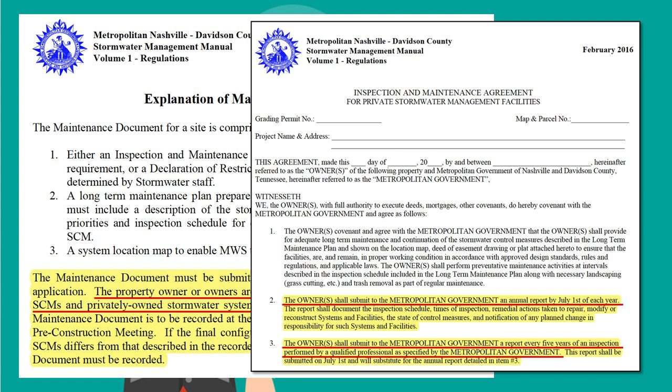Okay, what is it I'm supposed to do? Well, the manual in Nashville says that when you turn in a site plan as an engineer, you're going to have to fill out a long-term maintenance agreement. And then that's going to be assigned as a deed restriction that's going to go with the property basically forever. And essentially everyone else has kind of adopted that same strategy.

If you go into the details of this particular document, it plainly says that the property owner or owners are responsible for inspection and maintenance. So the burden is definitely on the property owner, and that's something that's oftentimes misunderstood.

In addition to that, if you get into the actual meat of what's required on a regular basis, it'll start talking about annual reporting. If you get into the long-term maintenance agreement itself, it'll say that you're supposed to do annual reporting, and then you're supposed to do maintenance as needed. And then every 5 years, you have to have a professional engineer actually do the inspection. So I started my business with the idea of being able to provide that at an absolute minimum.

Next question that I get asked all the time is, is this documented on the plat, and can I get a copy? That is, I think, a fundamental misunderstanding of what a plat is. A plat is just an illustration of the legal language that's in the deed, right? So it's go from this corner south 19 degrees, 35 minutes, 1 second east, 131.89 feet. That's what a plat is, okay? It just illustrates what's in the legal documentation.

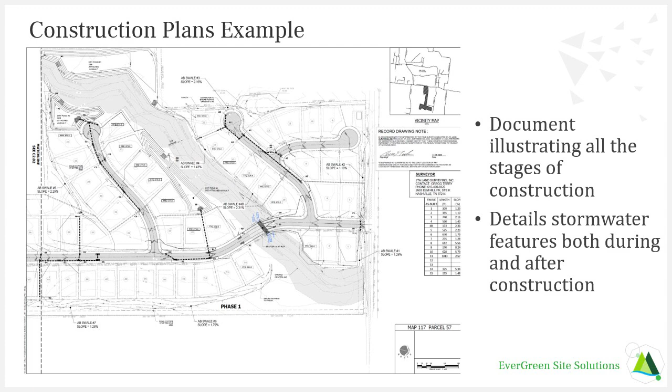What you really need to get if you are a property manager or if you are someone that owns a piece of property is the original construction plans. Those original construction plans are just priceless, and they're really hard to get a hold of. Once the project is built and it's 5 or 6 years old, those things are gone, and it is really hard to get them back after they're gone.

This is an example of some construction plans for a subdivision that was over in the Mount Juliet area. And you can see that this document will illustrate all the different stages of construction, and it details the stormwater features both during and after construction, and that's really key. The erosion control plans that are happening during construction is one kind of stormwater. That's the silt fences and the sediment basins and all that.

But what happens after construction is when those ponds get converted to something else, and that's really a fine dividing line. It's really important that you actually understand both. And those construction plans will have the details that are here on the left that show exactly what that's ultimately supposed to look like.

Nowadays, though, and this wasn't the case until just recently, what we're seeing is these as-built details and calculations. I'm starting to see them all over the place. It was just Franklin that was requiring this, but now Nashville is. Spring Hill's requiring it too. You guys may require it here in Sumner County. Marshall said yes.

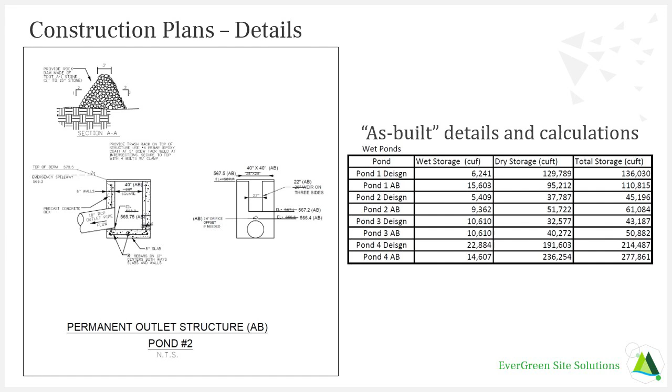So what's happening now is these ponds, for a long time, they were just built and no one actually checked to see if the volume was really what the volume was supposed to be. What's happening now is that we're actually going out after construction is finished and resurveying the pond to make sure that the holding volume is actually the right holding volume. So if we can get those as-built surveys, those as-built plans, that's also super important for long-term stormwater compliance.

It's estimated that there's about 8,000 of those properties, not flowers, 8,000 properties in Nashville that have some kind of stormwater feature on it. In addition to that, there's 100 new ones every single month. So if you think about how that looks, it's obvious if there's a subdivision or a commercial strip mall or whatever. What's not obvious is when they go in with like an HPR. When you guys see an old ranch house that's in Oak Hill or something like that, and it's an acre, and they go in, they knock it down, and they put up 4 skinnies.

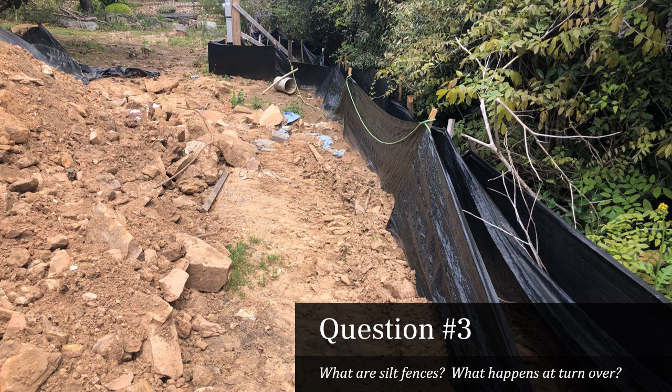So question number 3 I get, what are silt fences? People ask me that all the time. What are silt fences? What happens at turnover? What am I supposed to do? I deal with a lot of property managers. And silt fences, and a good turnover example is back to this one. This is the one in Mount Juliet like I was talking about.

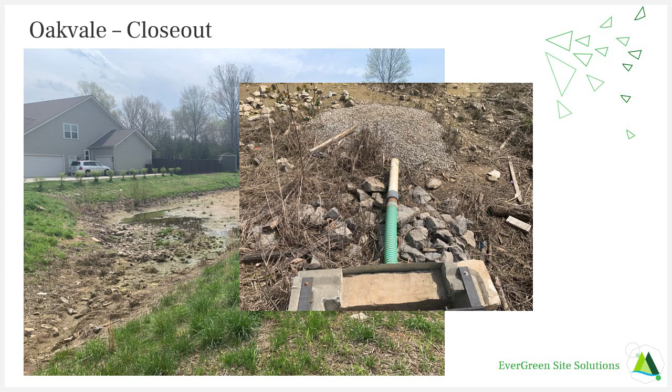This is an example of a sediment basin that was essentially, the developer was ready to turn it over, okay? So what you can see is it's all silted in, right? It's really got a lot of sediment in it. It needs to be hogged out. They need to do an as-built survey, but none of that was happening. This device here is called a Faircloth skimmer, as a lot of you guys know, but the top of it's been torn off and taken away for some reason. So this was just kind of left.

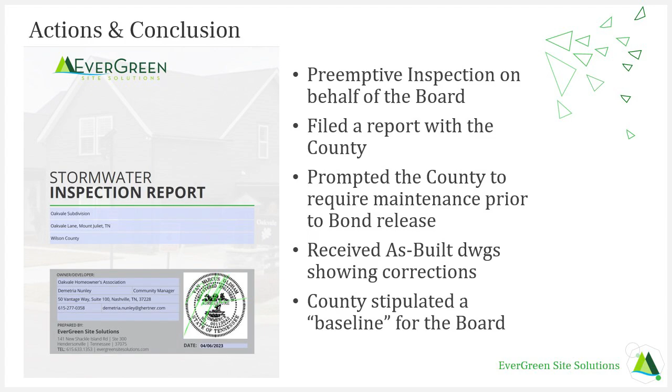And the HOA was really concerned about inheriting this and then having to maintain it as per Wilson County or Mount Juliet regulations. So they worked with me, and basically what I did is I went out and did a preemptive inspection, and we turned that over to the board, and the board gave it to the county, and that prompted the county to require maintenance prior to the bond release.

And ultimately we received as-builts, and the county, essentially by doing that, had kind of established a baseline for the HOA, because this is the point where the county said, okay, we're good with it. So anything past that was, you know, we're just trying to get back to that point in the future, if that makes sense. So moving on.

So question number 4, what has to be done and when? So this is the part of my presentation where I really kind of talk to you guys about lessons learned, specifics, right? So the BMPs or SCMs, whatever you want to call them, the things that we have done and the things that we have seen that work and what doesn't work. But I think it's really important to get that background because a lot of people just don't have it, and I want to make sure I give that opportunity.

So it depends on what kind of stormwater device that you have. So if you have a detention pond, or if you have bioretention, or you have a proprietary device, the requirements for what you have to do for inspection and maintenance radically change if you want it to actually be successful and function the way you want it to. And you always have to keep in mind what it is we're trying to do, which is to trap that sediment. The sediment is always there. It doesn't matter if it's bioretention, permeable pavers, proprietary filters, whatever. Sediment is the thing that's trying to clog it up. And so we have to keep that in mind constantly with what you're doing.

I like to start with detention ponds, and the reason I like to start with detention ponds or dry ponds is because that's what we have the most of. We've been doing detention or dry ponds here in Middle Tennessee since at least the late 80s, maybe even before that, in little places here and there. Sometimes I get calls from subdivisions that are super old, and they'll have a detention pond. It won't be a really great functioning detention pond, but they'll have one. And that's kind of when they started popping up.

Usually what we see is a lot of erosion around the inlet structures and the outlet structures, because once they're armored and then they get off the site, that kind of goes away, or it begins to unravel over time and then it doesn't get fixed back. So that's a big issue.

One of the things that I recommend to people is never cut the grass less than 6 inches. There's a lot of cities that are codifying that now. Franklin actually codifies that. You can't cut less, I think they say 5, but I always tell people 6 because it's just easier to measure. So don't cut it less than 6 inches. I tell HOAs all the time, if you're having the guys come mow it every 2 weeks during the summer, that's not a good idea.

It's not what we want. It's supposed to look a little shaggy in there. It's supposed to look a little bit natural. It's not supposed to look like Augusta National. So, you know, that's kind of something to keep in mind.

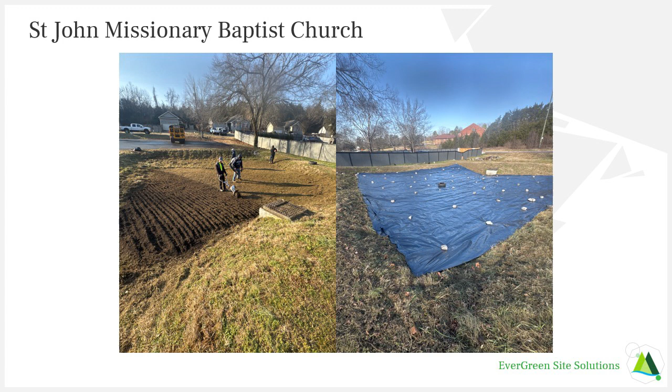And then the last thing is an idea that I came up with. Explore the idea of converting a detention pond to a wildflower meadow. So we've actually already done this one time. This is St. John Missionary Baptist Church. This is down in Antioch area. And I became pretty good friends with the pastor down there. His name's Gary Murray. And we cleaned out his pond because they had a violation with Metro.

And I came back later and I said, hey, Gary, would you let me kind of do an experiment here? And he was like, well, I don't know. What do you want to do? And I said, look, the problem is, if you don't know, it's something like 60 to 80% of pollinators worldwide have died over the last 20 years, right? Without pollinators, we don't eat, right?

That's a problem. Just 2-3 weeks ago, it was on 60 Minutes about the monarch butterflies. Did anybody see that? It was amazing. So monarch butterflies, every 9th generation, they have a super generation that lives for an entire year. Nobody knows why, nobody knows how, but they have a super generation that lives an entire year.

So if monarch butterflies are born on the eastern side of the Rocky Mountains, they migrate all the way from Mexico, all the way up into the United States, all the way up into Canada, and then every 9th generation, I think it is, they have a super generation that lasts for a year, and they all migrate back to Mexico, and they winter there, and then they have their babies, and they do it all over again.

So what's interesting about monarch butterflies is that they only lay their eggs on milkweed. That's the only thing they lay their eggs on. And in fact, TDOT's got a program right now where you can get milkweed seeds from TDOT and plant them in your yard if you want to. The reason is because monarch butterflies are dying like crazy. And a lot of it's because of habitat destruction.

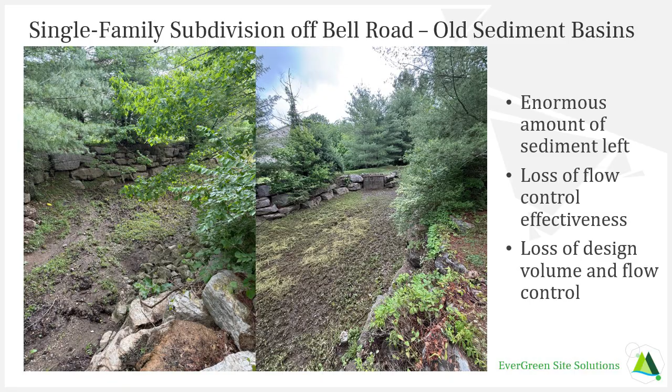So this is what happens when it doesn't go right. So this is a single family subdivision that I've been working with for a long time. They're over on Bell Road, outside on the east side of Nashville. And what you can see here is a pond that didn't have an as-built, and they used it as a sediment basin during construction, and then when they left, they just left, right? And so what you can see is just tons and tons of sediment, topsoil runoff from the construction of that subdivision, right?

It filled up the pond over time, and then it got worse as the years went on, right? So it's an enormous amount of sediment that's left. You're losing a lot of your flow control effectiveness, and then you're also losing the design volume, which was the whole point in putting the stupid thing in to start with, right? So you're having downstream erosion, you're gonna have downstream flow control loss. There's a lot of things that will happen there.

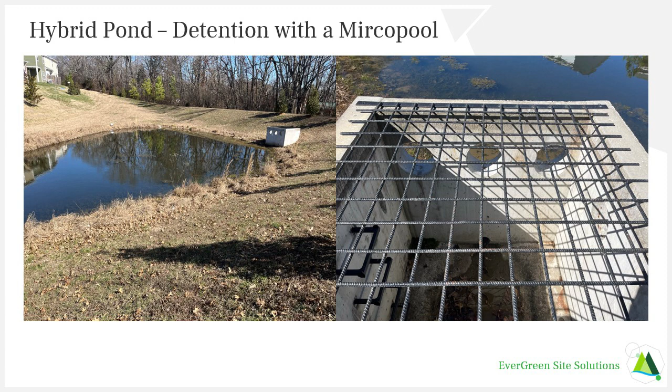This I kind of call a hybrid pond. I guess technically it's a wet pond, but it's really more of a detention pond with micropool, for those of you who have seen that in the manual before. This is really popular in like Wilson County, Mount Juliet area. I see it a lot over there, sometimes down in Rutherford County, but there's always going to be a little bit of wet storage over on the left-hand side. You can see that where things are separating out in the water column, and they're hoping for infiltration.

And then if you have a large storm event, the orifice here on the right-hand side will start controlling the storm, and if it gets high enough, it'll go into the other orifice at the top there. So you see that quite often. The biggest issue with these, honestly, is cattails. Cattails is the biggest problem, and the reason is because the depth of the water level is almost always like 4 inches or 6 inches. It's almost nothing, okay? And so it's an ideal habitat for cattails, to which people will say, so what, right? What difference does that make?

The reason it matters is because cattail population exports phosphorus and it exports nitrogen, believe it or not. They give off more than they take up. And so you start to think to yourself, why do we have bioretention? Why are there plants in bioretention? A big part of it is sediment, but another huge part of it is for dissolved pollutants like phosphorus, nitrogen, bacteria, and stuff like that. So if we're exporting it, we're kind of wasting our time, right? So there's nothing wrong with that design. There's certainly a lot of them out there, but as far as maintenance is concerned, we really have to stay on top of it, make sure it's doing what it's supposed to.

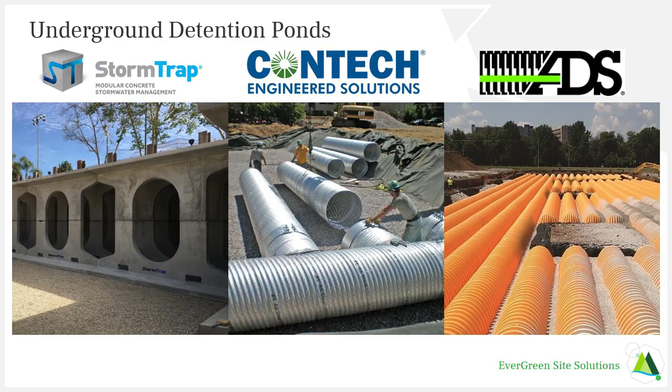And then, of course, there are underground detention ponds. Not something we see a lot in Sumner County, but a little bit. It's starting now. I think here in Gallatin, over there where the new hot dog place is, what's that place called? You know what I'm talking about, over there across from the plantation? Double Dogs, yeah. They put a big underground detention system in there, I think. I think it was actually a metal one.

But all of these are basically the same. They definitely have different uses in different places. You see the concrete a lot downtown, like in the Gulch, places like that. The metal is usually the least expensive option if the contractor has time for them to fabricate it. And the ADS chambers that are over here on the right, those are used a lot when you have a big footprint. So if you have a big Walmart footprint and you can put it under the whole parking lot, sometimes you'll see those because they're really easy. You can just grab them off the shelf. They're all the same size, they're all standard. So it's kind of dependent upon the project which one gets used, and they all have different usages.

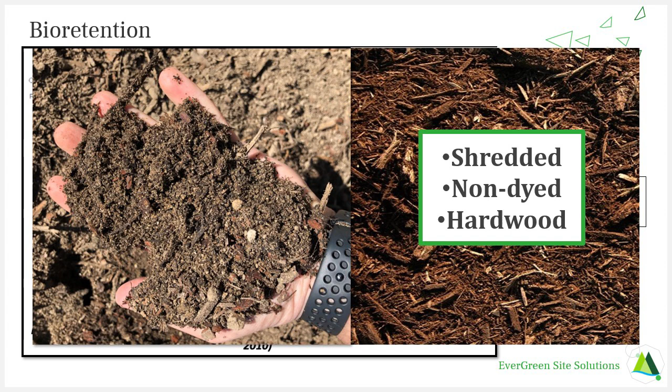This is, of course, what we see the most of, though, bioretention. Bioretention is extremely widely used here in the Middle Tennessee area, as well as basically anywhere in America these days. It's usually about 3 foot thick of media, and the biggest and most important and most neglected part of bioretention, in my opinion, is either the plants or the mulch. The mulch is key. It is really, really key. And in order to understand that, you have to understand how this system works, okay?

So I said I was living in Baltimore when they rolled it out. The reason they rolled it out in Baltimore is because they have a big problem in the Chesapeake Bay with phosphorus and nitrogen. So in order to get phosphorus and nitrogen out of stormwater, you either have to have a chemical or a biological process. So somebody came up with the idea that if we have bioretention with plants in it, those plants will be able to thrive off that nitrogen and phosphorus, and as a result, clean the stormwater.

So a lot of different mixes started being used, and the one that we use here, shown over there on the left-hand side, they're kind of like potting soil, but not really. They flow really, really fast. They're very open graded mixtures. The problem with bioretention media, though, is because it's really open, sediment wants to get down in there. And when it gets down in there, it clogs up those openings in the bioretention media. If it ever clogs it up, there's no way to get it out. It's in there, and that's it. So how do you deal with that?

Well, the way you deal with that is with the mulch, but it has to be the exact right kind of mulch. You have to be using shredded, preferably triple shredded or at least double shredded, hardwood non-dyed mulch. And if you use that, then it won't float away. The water has to go through the mulch before it gets to the media. And the reason that matters is it leaves all the sediment behind on the mulch. So if we remove and replace the mulch on a pretty regular basis, that media, which is really where the magic happens, stays healthy and stays good.

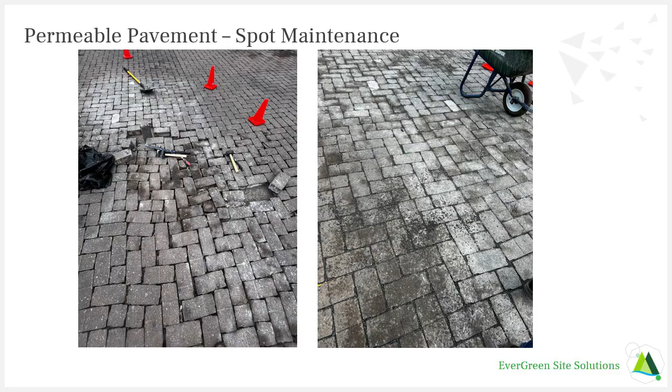I recommend that people do the regenerative sweeper every year, and then every other year we'll come back and we'll put in that crushed quarter clean to stabilize the bricks and stabilize the pavers. We do fix these on a pretty regular basis. Places where folks have pavers that are all torn up, we'll take them out, clean the aggregate below, and reinstall the pavers with the quarter clean like we're supposed to.

And then we also have other things that happen like this. This was a really odd situation. So we cleaned the pavers and we couldn't figure out why they weren't infiltrating. And you see that little brown line right there? What that is: during construction, they didn't have a lot of sediment control. So they didn't have a lot of silt fences.

And what happened was they had a really big storm event. There was a lot of sediment that washed onto the gravel, and then they didn't clean it. They just kept on building. And so it created this impermeable layer in the pavers where we couldn't get the infiltration capacity that we were supposed to. So we ended up having to dig a bunch of it out and essentially rebuild it. But that was one of the lessons learned: make sure your pavers are taken care of during construction. Otherwise, it'll be a problem after the fact.

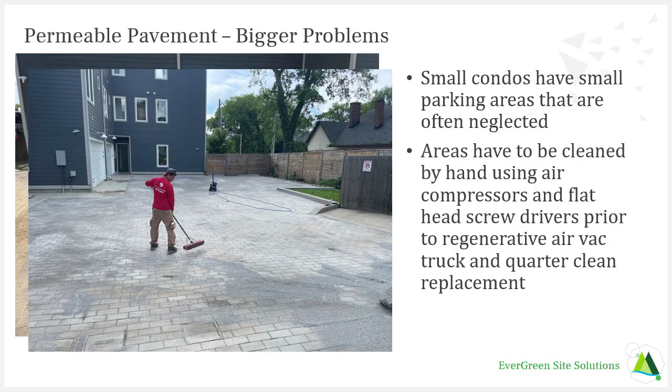Another problem is pavers are used a lot on little projects. So those HPRs, like I was talking about, horizontal property regime, they'll take a 1 acre site, they'll take away that old ranch house, they'll put up 4 tall skinnies, and in between they'll have a bunch of permeable pavers. That's totally fine. They work great. There's nothing wrong with that. But the maintenance is difficult because it's not very easy to get in there with the regenerative truck.

And so what we've done is we've started using a system where we literally use flathead screwdrivers and an air compressor, and we blow it out that way. And then once we've blown it all out, we vac it up. And then of course, after we've done it, we come back and put in the crushed gravel as well.

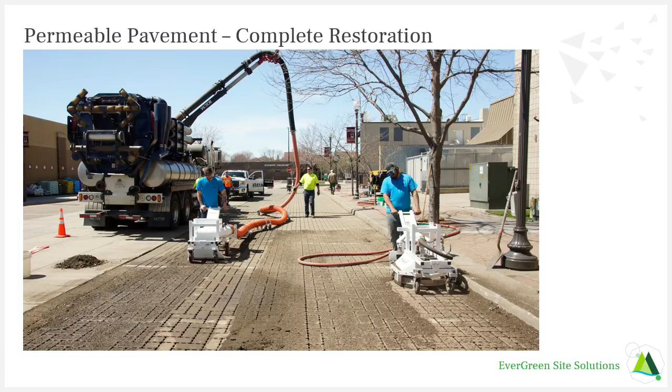Now, if all hell breaks loose and the pavers are just completely clogged and they're still there, but you can't do anything with it, the only thing that I've seen that actually works, and there's research for this, is this machine here. It comes out of Minnesota. That's called a Typhoon. And what that thing does is inside there's these arms, and they actually don't turn real fast. They kind of turn slow.

They have extremely strong jets of air that blow all the sediment and all the aggregate and everything out from between the pavers. It just completely blows it out. And then you come behind it with essentially a huge vacuum cleaner. You just suck it all up, and then you put the pavers back. Now that's the only thing that I've ever seen that will actually bring the pavers back to 100% capacity. But there's some research out there from University of Toronto that actually details it, and it's very, very compelling stuff.

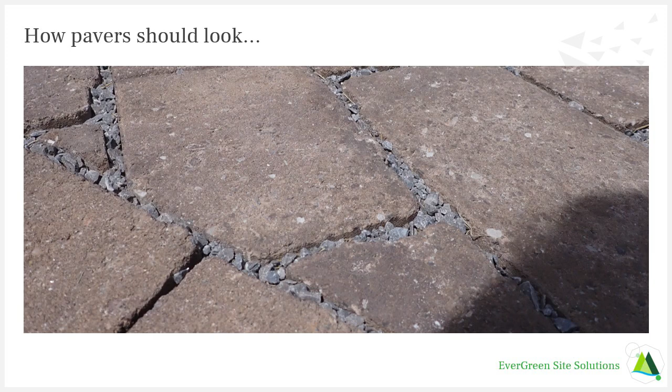This is what your pavers should look like. This is one that we just got done with. You can see how that stone comes all the way up to the surface. That's really, really important.

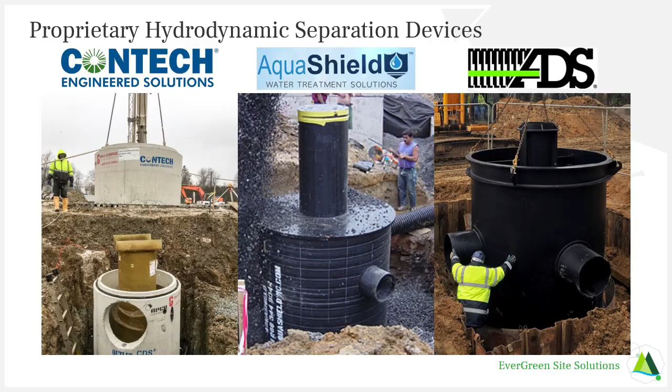Hydrodynamic separators, proprietary devices, I just got about 5 minutes. There's a million of them on the market. AquaSwirl or AquaShield is the one we see probably the most here, and the reason for that is because they're from Chattanooga. So they were made in Chattanooga. They got bought. I don't think they're there anymore. But as a result of them being local, we see those here a lot. I love these things. And the reason I love them is because they're really simple to maintain. It's really, really simple to maintain, and it's also very predictable.

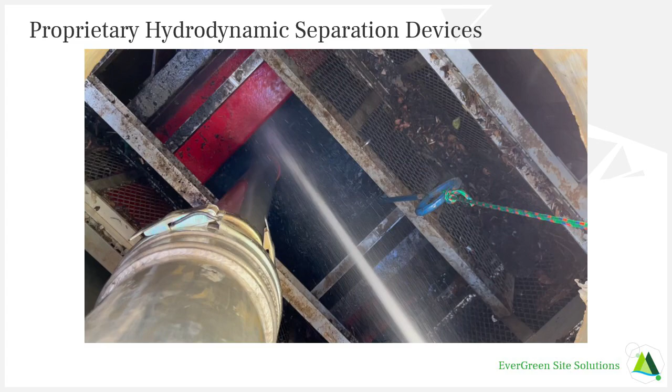So I've never, ever maintained one that it wasn't completely full of junk. I mean, it's always full of sediment. It's always full of trash and debris and everything else. They're always completely clogged with stuff. And it's predictable. You can say, if I come out here every year like they tell us to in the O&M manual, it's going to be full, I can vac it out, and then we can be gone. Usually it doesn't require any confined space entry. Sometimes it does, but not always. And it really does a good job.

Proprietary filters are kind of the next step up from those hydrodynamic separators. They filter the water, and it's what's required if you're in Metro Nashville and you can't infiltrate. If you can't do bioretention, then you have to do one of these. These are approved by New Jersey. New Jersey is kind of the end-all be-all on the eastern side of the country as far as proprietary systems are concerned. And there's a bunch of companies that make different stuff. We've maintained all of these at one point or the other, and I'm agnostic as far as which one I like or don't like. They all have positives and negatives and good things and bad things about them.

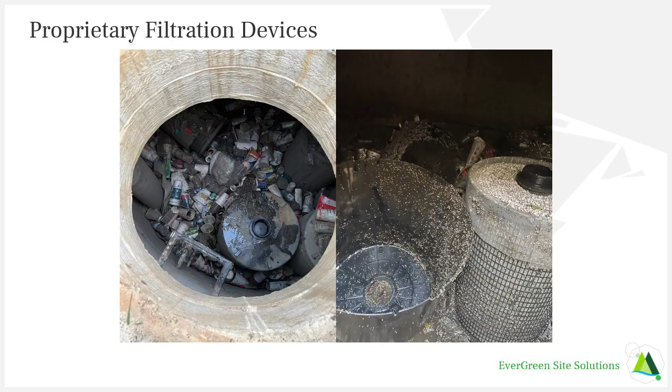This is a storm filter that we did. The reason I show this is I like for people to actually see what's in the stormwater. So this is what would go into the lake, right? Or this is what would go into the river, and what did for years and years, but it doesn't anymore, or at least not as bad as it used to. The filters that you can see there on the left are all torn up. They're needing maintenance really bad. And then when you get down inside, you can actually see sometimes that they end up getting pounded by stuff and falling apart and everything.

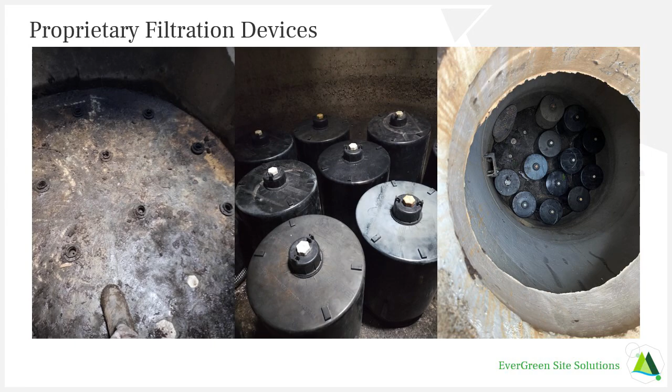So the way that we maintain them is, first off, we take all the filters out, we take them to the surface, and then we suck out all the sediment that's on the bottom of the vault. And then when we get to the top, we take the cartridges apart and we pull those out, and then we suck all the media that's inside the cartridges, we suck all of that up. We take the shells and we send them back to the company, but we usually have brand new cartridges that are right there that day, and we just click those in. And then, you know, we're on our way.

Now, the way that you can tell if these things are working or not working is, first off, if you show up and it looks like that previous picture, they're not working. The second thing that you can tell is if there's water in the vault and it hadn't rained in the last 2 or 3 days, it's not working. If there's 4 or 5 inches of sediment on the bottom of the vault, it's not working.

And then the last one, and this is the one that's tricky: if there's a 1/4 inch of sediment on top of the cartridges, if that's there, they're also not working. And the reason for that is it's an indication that water is moving too slowly through the filters and out the system. And because of that, stuff's falling out of suspension. And that one's the hardest one to catch.

So what we do at EverGreen is notices of violation. Those happen all the time, right? Comes from different cities, you know, Chattanooga, Knoxville. We're working down in Atlanta and Alabama and Florida and places now as well, North Carolina. The city sends a letter of violation to a property owner. They get in contact with us, and what we do is we provide them with a plan to get them back into compliance, and then once they're back into compliance, we'll put them on a plan.

And the plan is either EverCare Standard or EverCare Complete. EverCare Standard is real simple. We go out every 6 months, we do the inspections, we do the professional reports, we file it with the city. For a long time, that's all I did.

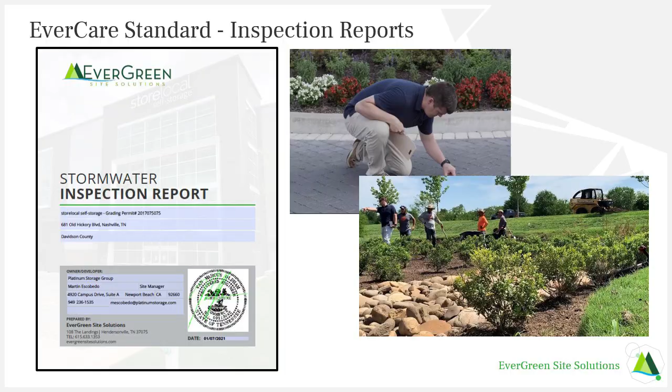This is an example of what one of our reports looks like. There's me doing some inspection there. And then this is us with the crew talking about how to do it and what to do and what not to do. Been doing this a really long time. This is the first maintenance event that I was involved in. This is actually down in San Antonio when I was living down there, with a pump truck that they had there with the city, and we coordinated all this to do a maintenance for everybody. And I have literally been doing this since 2007, crawling around in sewers here and there and everywhere.

It's a funny story about this one. My twins were like 1, and it was raining in San Antonio, and that's the first filter that I knew of anywhere in San Antonio, and I kept trying to catch it full of water so I could put it in my presentation. And it came a rain, and it was like 10 minutes from my house, so I loaded the kids up, I loaded my wife up, and we rolled over to this place. This was a CVS in front of these apartments across the interstate from UTSA, and the kids that lived in these apartments kind of used CVS as their grocery store.

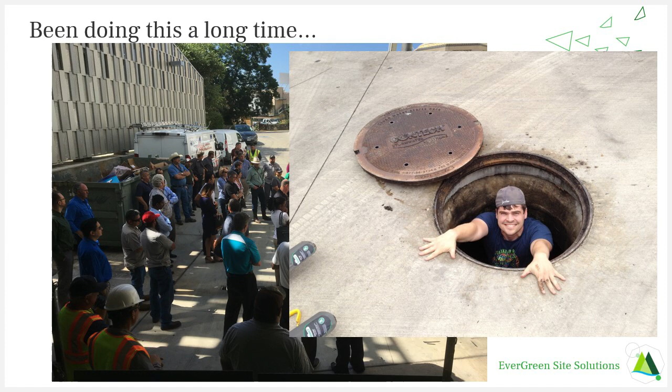So I got out of the truck with my tools, and I go over there, and I'm pulling the manhole out. As I'm walking, I see that there's these 2 girls under the porch at CVS. I didn't pay attention. I kept going. I pulled the thing up. I'm laying down in the parking lot. It's raining. I look awful. It's muddy. It's a mess. And I was trying to get pictures of these filters.

And I kind of hear this noise. I look up, and it's those 2 girls. There's been a slack in the rain, and they're trying to get back to their apartment. They're maybe 5 feet from me, and I heard one of them say to the other one, "Just keep walking." And I told the guy at work, and he said, "What you should have said is, 'Would one of you mind stepping into my office?'"

So the last thing that I wanted to mention is that we have changed. We have a new brand. We're now EverGreen Infrastructure. We started out as EverGreen Site Solutions. There's a lot behind that, and I'm not going to go into a ton of it, but we're going to be providing a lot of things in the future that we haven't done in the past. I'm really excited about what we're going to be doing.